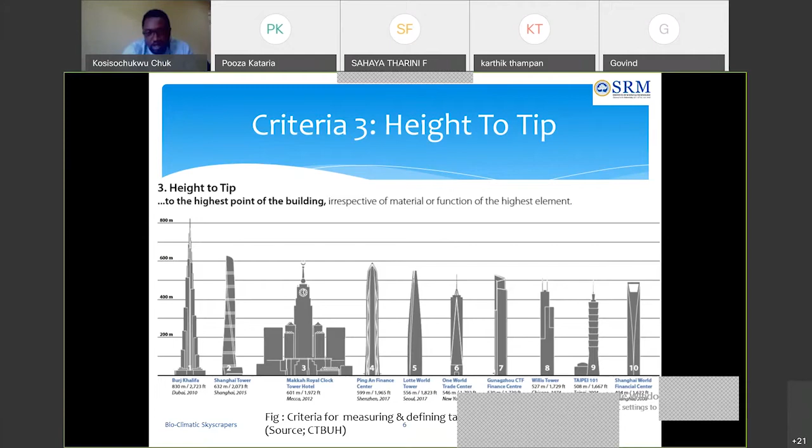And if you fast forward about 100 years later, you can see to your right there, the One World Trade Center. You can see how the later versions of skyscrapers kept becoming modified as technology advanced.

So technology is one factor that has influenced man's seeking after construction of tall buildings. Because if you do not have the technology - if you cannot construct, if you do not have inventions like steel and all that - you realize the structure cannot go that tall into the sky.

So if you look at another scenario in Europe, Europe didn't actually catch on as fast as America. America set the pace when it comes to - they invented the skyscraper typology. And then elsewhere in Europe, you can see Europe didn't catch on very fast. It took them up till the 1950s before they even began to experiment with buildings over 100 meters.

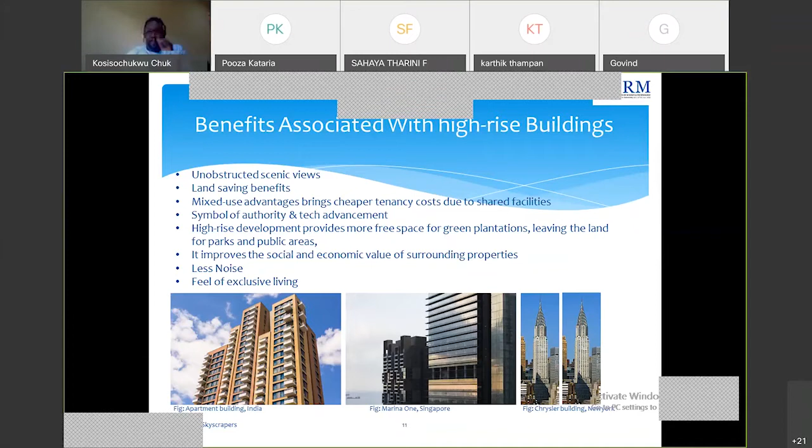And now we're going to look at the challenges associated with high-rise buildings. Like I say, every coin has two sides. You cannot throw away the side that has the face of the politician and take the side that has the number of the currency. You cannot do that. So every coin has two sides. High-rise buildings provide us with immense benefits, but they also pose a lot of challenges, which we are going to summarize here.

So from this, you can see clearly that high-rise buildings have more demand for heating and cooling as against the conventional type of building. It is also resource intensive due to excessive scale and complexity of design, and urbanization and insecurity of resources are key challenges. A wrong design strategy can lead to more energy consumption.

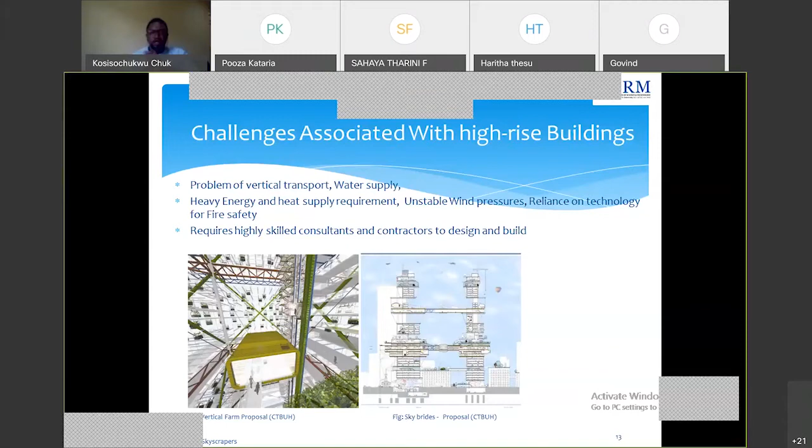So having discussed the factors that encourage high-rise development, we can now look at bioclimatism, which is simply the principle of green building. So, bio, which is life, and climate. We are life. Buildings need to be sustainable in the long run, as a principle of bioclimatism. It aims at building with the surroundings and local climate. So I'm going to demonstrate what we can take back to research, with examples of that. So we have one feature.

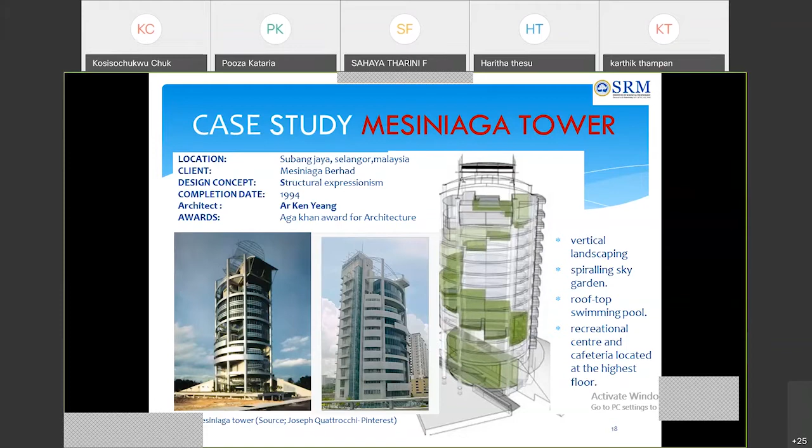So if you look here, the image on your left, you can see some recesses. It's not a box, not a glass box. I mentioned the glass box ideology earlier; you can see that this is not a box. He has allowed some recesses along the facade to make sure that natural light as well as ventilation comes in at organized intervals, not arbitrarily. So that is what you mean when you say bioclimatic orientation.

He has studied the wind direction, the sun direction, the solar path as well, so that you position your building in such a way that it maximizes the solar elements of light and energy. Then you talk about the already mentioned solar shading, optimal positioning of services, and it maximizes natural lighting and ventilation.

Here is the EDITT Tower. This tower is located on Waterloo Road, Victoria Street, Singapore. The client is the Urban Redevelopment Authority of Singapore. It's again designed by our friend and patriarch, architect Ken Yeang. It has 26 stories into the sky. So suppose we use the convention of 3 meters, or at most 2.7 meters, per story, multiplied by 26 stories, you see you're very far off the ground.

So you can see from this image how he has been able to again take up the ecological elements of flora into the facade of the building, up the facade of the building. It's a very interesting one to look at, and it's also a beautiful rendition here. You can see that it's actually very beautiful to do bioclimatic skyscrapers as against hot boxes called modern.

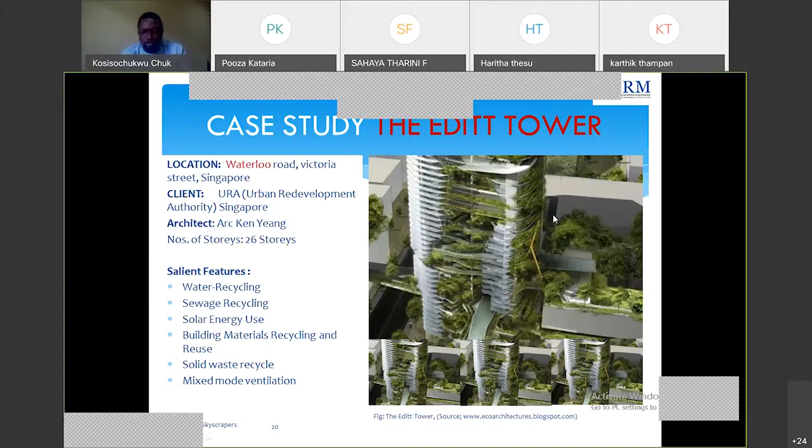So the next slide also continues to explain what nice features this particular tower has incorporated. It has sky courts, convertible for future office use. It has removable partitions. It has removable floors. It also features mechanical jointing of materials, flexible interior spaces. And then it also features high-level bridge linkages added to connect the neighboring buildings for greater connectivity, which is a lovely feature. I really like this because if I know that I don't have to go to ground zero before I can connect to the next building, it's lovely because it saves me time.

Then you talk landscaped ramps upward from the street level, as you can see in the image, and well-planted facades and vegetated terraces. Very beautiful site.

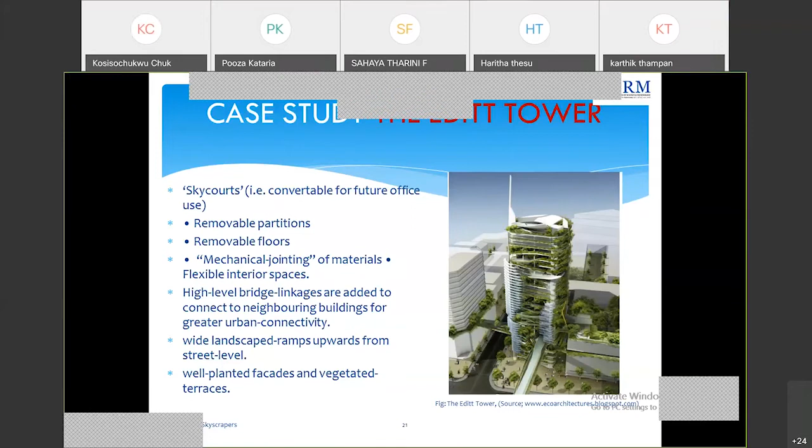So if you're an architect and if you design to meet any of these standards, you win points, you earn points. There are a number of energy rating systems used across the world by different regions. We have the leadership in energy and environmental design, which is LEED, the most popular all over the world. We have BREEAM, which is this one. And each of these, I think you have the Three Star for China.

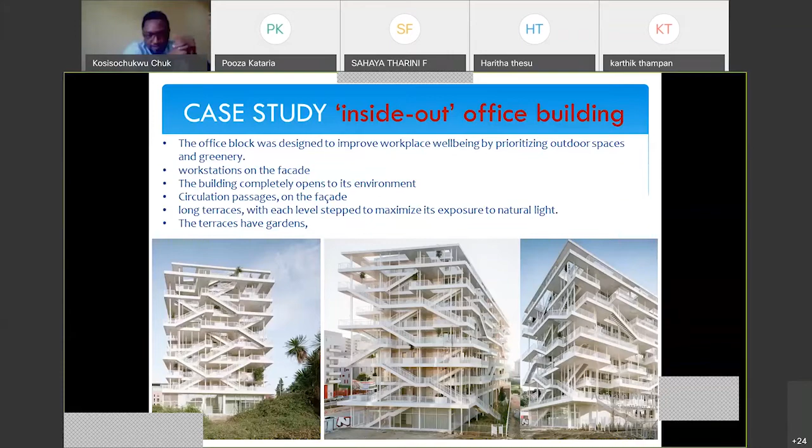They have studied the path of the sun over this building, and they have provided a shaft so that at every point in time, the direct sunshine or what you can call daylight from the environment can get into the part of the building, which is a lovely feature, as against trying to provide light completely artificially. So they have done a very wonderful one there.

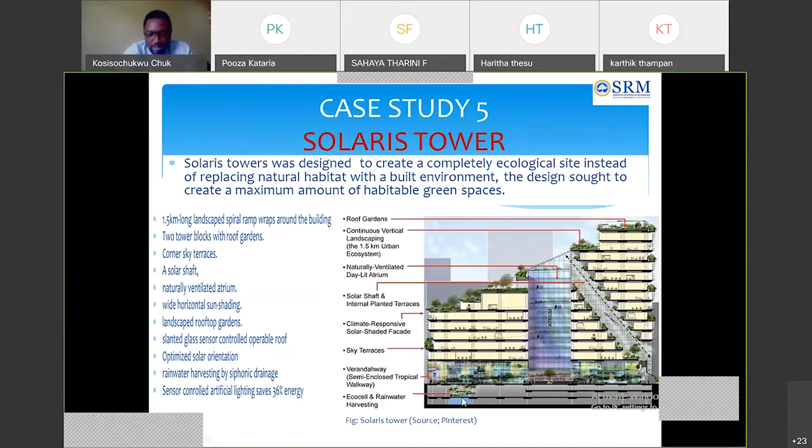So this is a very wonderful example of Ken Yeang's relentless efforts towards bioclimatism, as we have mentioned. The Solaris Towers was designed to create a completely ecological site instead of replacing natural habitat with a built environment. The design sought to create a maximum amount of habitable green spaces, which came up with this very beautiful facade on the screen. So it's a good one.

Then we can also consider the Spire Edge Tower. The Spire Edge Tower is located in Haryana, India. It has a total number of 21 floors, again by a veteran, Ken Yeang, and the building has won an award as India's first bioclimatic skyscraper. You can see how the greenery is brought up to the roof by a series of vertical landscaping elements, very beautiful facade massing, you can say, a series of sky terraces and rainwater collection mechanism, treatment and storage for circulation.

Am I able to come in? Can you hear me clearly? Yes, we can hear you. So, features include, I already mentioned the rainwater. Anyone there? No, sir, we are here, sir. We are listening. Okay, thank you.

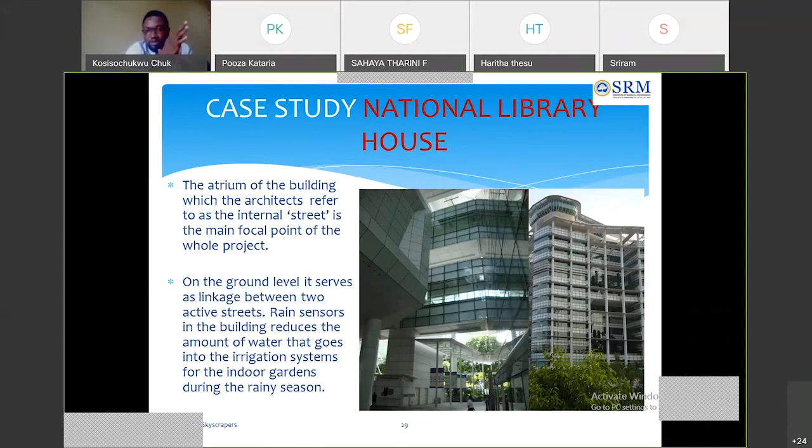In building. So when we talk about bioclimatic design, like already mentioned, more or less the same thing, only applied to skyscrapers this time. So in summary, the same principles should guide your entire designs. So if you're doing a low rise, a medium rise, or a high rise, you should try to apply principles of material efficiency, energy efficiency. All these are very vast fields.

Energy efficiency alone, you can discuss mechanical versus passive cooling. You can discuss daylighting. You can get acquainted with these. These things are most times easy to integrate if only we can stand up for them. Sometime in a project, I was a project architect. We were in a meeting, a site meeting, progress meeting, and we had this issue.

The roof had a very large surface area, and the auditorium spanned close to 200 meters, and the structural and civil engineers wanted the entire roof water to be allowed to go, because over here in Nigeria, we have lots of pitched roofing, and we usually pitch the roof and overhang it so that the water goes. But with different seasons, we have what we call the wet season, which comes to roughly 6 months. So the engineers were all out on water.

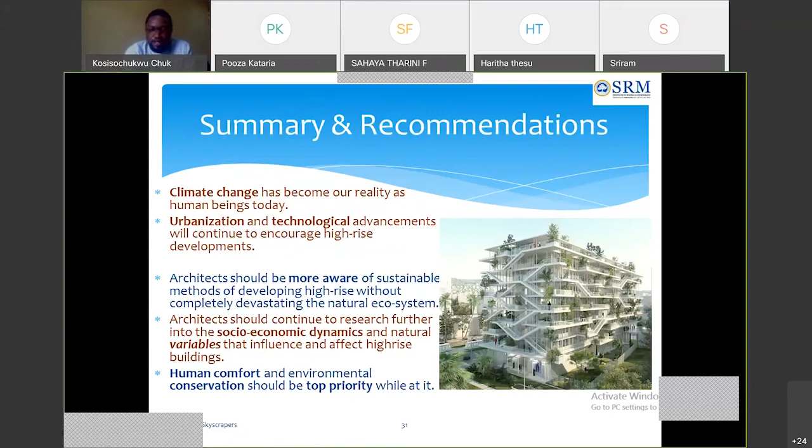I wouldn't want someone to say, oh, but in my immediate environment we don't have too many skyscrapers, so why waste my time. It's not a waste of time. You can actually move to a place where there are more high-rise buildings with which you can do your research, and when you are done, you can publish your findings to help others.

So I'm going to, if it is allowed, I don't know, and maybe take a few questions as well. Thank you very much.

Thank you so much, sir. You really opened a new avenue in front of us. Generally, we think skyscrapers are just tall blocks, vertical developments, but you did tell us there has to be more sensibility in building skyscrapers. So that was a good insight for all of us, and I'm sure all the students are inspired to do more research into that area. Sir, can we take a few questions now from the audience?

Yeah, I'll be glad to take questions. So, audience, all the participants can post their questions in the chat box, and I can read them out to sir.

So, one of the questions, from my side: what are the challenges we face while doing bio skyscrapers in a country like India or a country like Nigeria, where we are still developing? How is it accepted, and what are the challenges that come in the way?